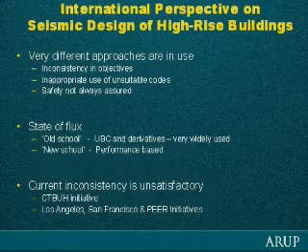So if we look at the differences between the two schools: the old school only allows you to use certain structural systems. It prescribes minimum lateral forces, and it's got rules for everything—you have to do this, you have to do that. It's a single level check based around a 500-year return period. When you finish the design, you don't actually have to show that it will perform in a satisfactory manner—that's implied by the fact you followed all the rules. And frankly, beyond about 100 metres in height, it's pretty well extrapolation, because the codes and systems and rules were never envisaged for the modern generation of ultra-high-rise buildings.

The new school is performance-based or deformation-based. Here we're looking at setting meaningful performance targets which your clients can have a say in deciding. We've got total design freedom—I've got another talk this afternoon and I'll show you where that can lead us. There's no prescribed systems, you can do what you like, provided it works.

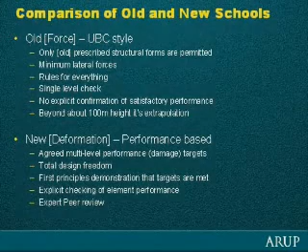And then you have to demonstrate from first principles that the design targets are met, and we look on an element-by-element basis rather than an overall system basis. But the common feature of the procedures as carried out in various parts of the world is that there is an expert peer review as part of this process.

And in keeping with modern thought, we're moving away from the idea of seismic forces and moving towards the idea of seismic-induced deformations, and there's various good reasons why we should do this. Working up from the bottom, ductility demands are related to deformation. Damage, non-structural damage, is related to deformation. And another thing very handy for us designing high-rise buildings, which have very long natural periods, is that in this long period range—it's been known for a very long time—the amount of deformation is not really very sensitive to how strong you make your structure. So the idea that providing force or strength gives you safety is not necessarily the right way to be thinking of it.

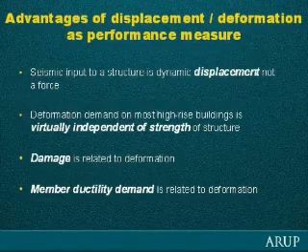Performance-based design is in practice in Japan and China, and it's mandatory for buildings exceeding certain height limits. There are no minimum strength limits, so there's no minimum base shear. There's no prescribed systems, but you have to assess damage by first principles, and you check things element by element, story by story, to make sure your performance targets have been met.

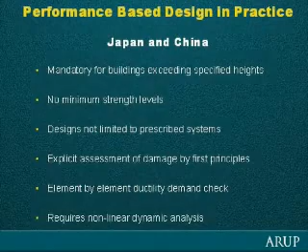But it does require non-linear dynamic analysis, and people have tried to persuade me for years that static pushover is the answer to all our wishes and requirements, but it simply isn't for high-rise buildings, where they are multi-mode structures if you think of them in an elastic sense. So in Japan, it applies to all buildings over 60 metres, and there's a two-level check.

The first level is an elastic check to make sure the structure essentially remains elastic, that is undamaged. And this is related to the important issue of economic loss. We're maybe not only concerned about life safety, but also economic loss and damage.

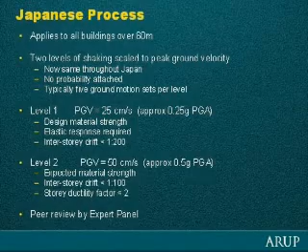The second level is at twice the amount of shaking, and there is an interstory drift limit, and various ductility factors must not be exceeded. But there is peer review by an expert panel of 24 professors who give you a grilling.

And it won't be approved unless they're fully satisfied that the building works. In China, it's very similar. Thinking about what we might end up producing, I think that what they've set in place in China is very sensible, because they have different seismic zones in China, and there are various limits they set based on the structural form and the seismic zone.

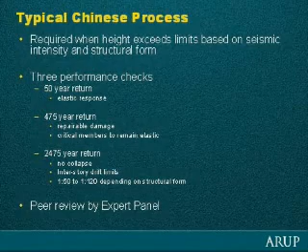That seems quite sensible. They have 3 performance checks, which, if you want to look at the details, are there. But again, there's a peer review by expert panels. Again, it is largely professors who make sure that they're completely satisfied. And they've stopped things in the past. They say, I'm not satisfied by that, go away and do something else.

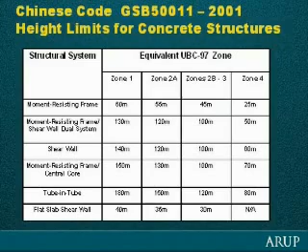This just shows the Chinese height limits for concrete structures, just showing that they've thought about what should be permitted, what shouldn't be permitted in their different seismic zones.

So if we compare with what people are more familiar with, probably in most of the world, it's the UBC, IBC, Eurocode 8 is similar. It's a force, strength-based approach, looking just at life safety and force over 500-year return period, based on linear analysis, normally linear response spectrum analysis with ductility reduced

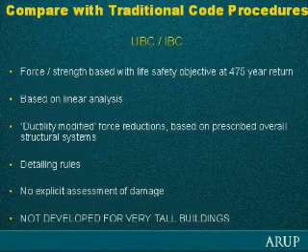reductions, based on prescribed overall structural systems. And there are detailed rules, no explicit assessment of what damage might occur. And I'll just remind you, it was never designed for very tall buildings. So what are the problems with it?

Well, only a dual system is permitted. And if we look at this, it can be both uneconomic and architecturally restrictive. And also, it doesn't guarantee the building will perform very well. So altogether, that's not very helpful.

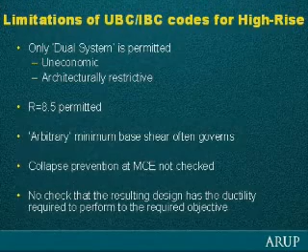You're permitted a very large force reduction factor, but an arbitrary, and it is entirely arbitrary, minimum base shear often governs. You don't have to check whether the building will collapse at a high level of shaking, and you're not required to check that the design you've made does actually perform to the actual required objective, which is life safety.

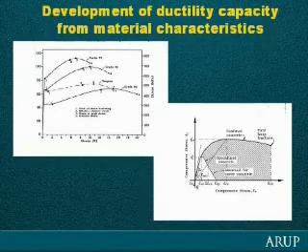And this is a bit of a problem, because we've been taking a look at some UBC designed buildings, assessing them by performance-based methods, and finding actually they don't perform very well at all. And we can look at how much deformation capacity is available by looking at the basic material properties of concrete and reinforcing steel, for example, for reinforced concrete buildings.

And depending on how much, many of our structures these days are core structures, reinforced concrete core structures or shear wall structures, and in general, the cores or shear walls will take gravity load. I mean, a part of the vertical system as well.

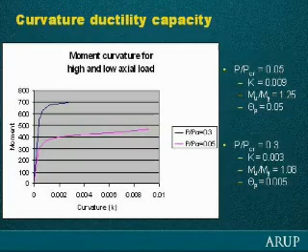This is the economics of high-rise buildings. And basically, if you've got a very heavily loaded or significantly heavily loaded member in compression, the permissible ductility is about a tenth of what it is if you don't have that axial load. So this actually is quite a problem, and people are applying the code without realising this.

So here, this is a floor plan for building. Is this a dual system? It's got concrete shear walls, it's got perimeter frames. Is it a dual system? Is R equals 8.5 appropriate?

And this idea, well, small print on a dual system, which people don't often read, is that the lateral resisting element should not take much gravity load. They don't say how much, but that's the implication. But actually, if we're designing a building 200, 300 metres high, we don't really want some elements to have not much gravity stress on them and others to have a lot of gravity stress on them, because we end up with differential vertical shortening problems. So there's other risks which haven't really been thought through.

Anyway, this actually isn't a dual system in the strict sense of the code, because the core is taking a lot of gravity load.

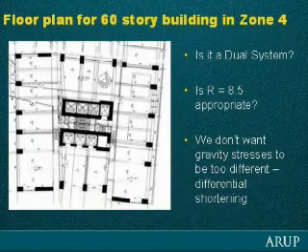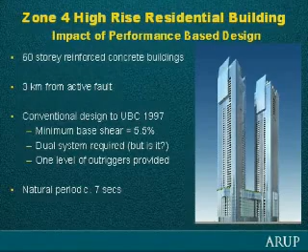And if you look at this building—I won't talk about it this afternoon in other contexts—the minimum base shear is 5.5% to the code. It's got outriggers. Are outriggers allowed in the dual system? All these questions aren't really covered in the old code.

What we found was that although the code says you've got to design for 5.5% base shear, you can show it performs adequately designed for 2.5% base shear, which is actually what the effective wind load was. And if you had designed it even for the 5.5% base shear, doing the design of the core the way you eventually do it, you reduce your seismic forces by a factor of 8.5.

You stuff your core full of compression reinforcement to take those reduced loads with the concrete, and you find it has negligible ductility at the bottom of the core, which is one of the places where you need significant plastic rotation. So the code design wouldn't work, yet here's a design with a lot less material that works better than an unsafe code design. This is good news, because we can do a better design more economically using performance-based methods.

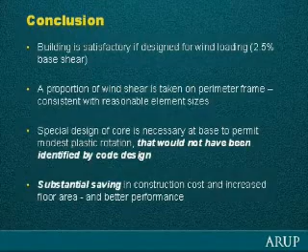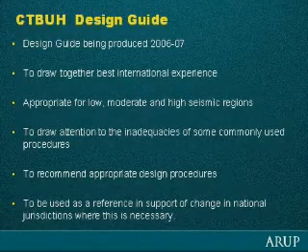What we're trying to do is produce a design guide. We're writing it right now. We want to look at best international experience. We want it to be relevant not only in high seismic zones, but in lower seismic zones too. We want to draw attention to the inadequacy of commonly used procedures and recommend more appropriate ones. In some countries a UBC-style code is the law—you have to comply—so we hope this guide might be used as a reference in support of change in those jurisdictions, because it needs to happen.

It's meant to be wide-ranging—it's not just about structural engineering. There are lots of issues too, such as, when we move into time history analysis, selecting ground motion.

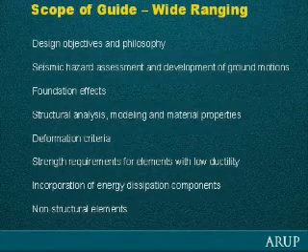It's being written by these two people, myself, Klemencic and Willford, and we want to send it round for full review by whoever would like to review it. So if you'd like to review it, I'd be pleased to take your email address and we'll include you on the list. Thank you.

Okay, brief feedback on the CTBUH working group on the sustainable design of tall buildings. You'll notice there is not a tall building represented in the title slide, which was a conscious decision.

I want to start with this, which I think represents one of the biggest challenges facing the incorporation of true sustainable design in all buildings today: it's greenwash. What that means, in my book, is the lack of systems to allow anybody to claim that their building is sustainable, the way forward, the answer, and then not back that up afterwards.

They involve so much special research that they have this opportunity to really push forward systems of sustainable design—whether that's technologies or sustainable design approaches at a conceptual level. They have the opportunity to lead the way, because there's an expenditure in them, both financial and in personal and professional energy, which is perhaps not replicated in smaller buildings due to their size. So tall buildings really could be leading the way.

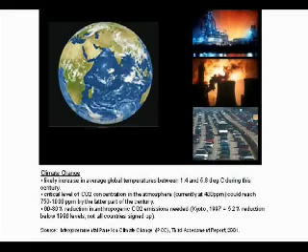I just want to run through quickly a draft agenda for what this group could be studying. I'm not going to dwell on the reasons why sustainability is important. I'm sure you all know that, to do with climate change and other factors.

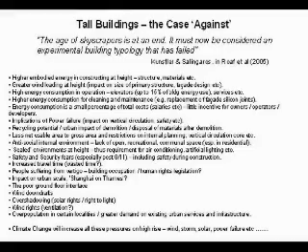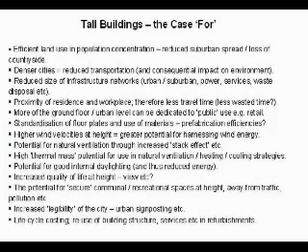Of course, there's a case for why they are environmental, or good sustainable approaches. This has to do with the bigger picture, and the bigger picture is to do with denser cities. It's to do with not an ever-encroaching suburbia on developing cities, and by developing cities I mean those developing in places like China, India, and the developing world.

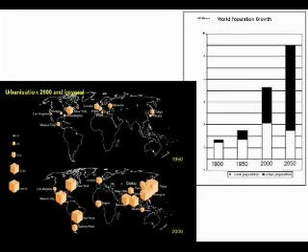The relationship of tall buildings to cities is important, and it's not just the developing world. In the UK, population demographics, even though our population is more or less static - not as static as they thought, because of immigration from Eastern Europe, but more or less static - there is still a requirement for 2.6 million new homes by 2020, even in a country like the UK. Now why is that?

Because of the population demographics, social demographics. People are living longer, there is more divorce, there are more single person homes. All these factors require homes. Where are these homes going to go? A lot of people believe they need to be provided in denser cities.

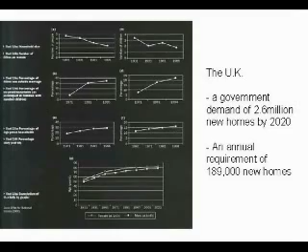I put this slide up not just to show that the UK and the USA are very good at energy consumption, or consumption full stop, but also to show that approximately 30 to 40% of all energy usage is reckoned to be taken up by buildings, and a further 30-40% through transport. Now, buildings and transport - that's cities. That's within our remit as professionals, what we can influence. That's the majority of energy usage.

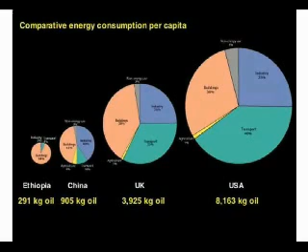The presentation yesterday on Songdo City - there are professionals amongst us actually creating whole new cities. And that relationship between buildings and transport is vitally important.

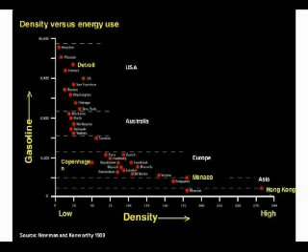Again, one of my favourite graphs to show, to reinforce this - this is a graph of energy usage against density. You'll see that some of the most energy efficient cities are the denser cities, such as Hong Kong, Singapore, and some of the European cities where public transport systems and things like this are perhaps more used.

So the working group - I should explain at this point that the working group, the Council Working Group on Sustainability, consists of just me. It is the newest of the 4 working groups so far. So these are just some thoughts I'm putting across, and the message I want to put out today is, if you want to get involved in this, please contact me, because these are just my ideas.

But it's going to be looking at international case studies - international case studies that have been hailed as sustainable tall building designs, of which I'm sure many are. But if they're so great, why can't we see the data? Why can't we use that data? Why isn't it monitored? Why can't we use the data to further the cause, so that this is implemented more by clients and developers?

Interestingly, another major challenge in tall buildings is that energy usage in itself is actually not much of a factor for most major corporations. It might make up somewhere between 1 and 2% of their total expenditure when you compare to salaries and all the rest involved in running that operation. So if someone comes to a client and says, I can cut your energy usage by 50%, that's obviously not as much of an incentive as cutting the salary bill by 50%. So that's also a challenge in getting professionals involved in the financing of tall buildings, and buildings generally, to take sustainability seriously.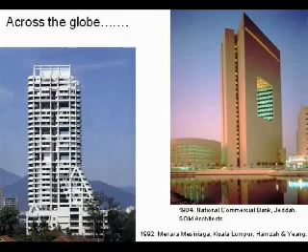So, international case studies across the globe, built and unbuilt. There's a lot of work being done in academia and other places which actually doesn't get to be built, but is of real worth in terms of what it brings to the party.

Sustainability for me is not just about energy usage, it is about other things - for want of a better term, sustainability of an internal environment. As in all architecture, things are about compromise and trade-off. We could make the most energy-efficient building, but it's also about quality of internal space.

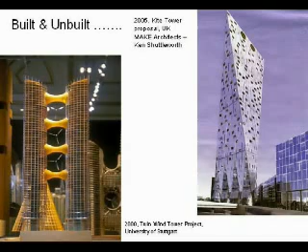Some of the most interesting projects we saw yesterday were not necessarily those that were just glass towers. However, that has a knock-on effect on the quality of internal space, light and other things. So this has to be considered in symbiosis.

However, these people are almost all exclusively from one socio-economic group - young professionals who are at that stage in their life where they want to live in the city. As soon as they get married and have kids, they move back out to the suburbs where they want a house and a garden, because tall buildings around the world generally do not provide for families. There is a lack of community, social, public space.

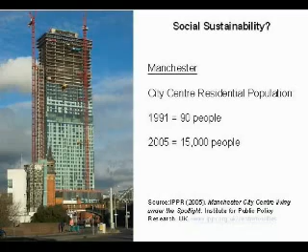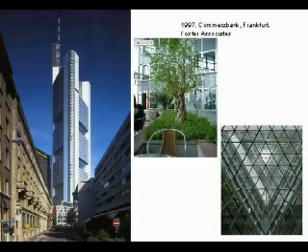I'm not going to go into this, but one of the projects that we did at my last university was looking at how Commerzbank could be a model for a sustainable residential development, and how these sky gardens that step up the tower could actually become communal gardens.

To finish, an initial agenda. As I've said, there is an opportunity for tall buildings to lead the way in building sustainability because of the investment in them.

I think this agenda needs to dispel the myths, dispel greenwash, and make a push for post-occupancy monitoring amongst clients and professionals. Who knows? Could we have a LEED rating point for agreement for post-occupancy monitoring? Or could a requirement for LEED rating actually be an agreement for post-occupancy monitoring?

Controversial statements.

An intention for the group is to examine best practice internationally. One of the things that the Council does very well with its international base and cross-disciplinary membership is actually looking at what is the criteria, what are the differences, what are the similarities across LEED, BREEAM, CASBEE and all the other international bodies, and trying to bring some sense of the different approaches there.

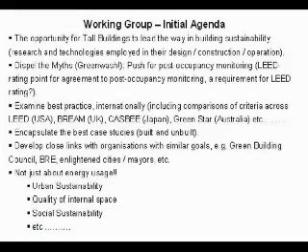Encapsulate the best case studies in the built and unbuilt realm. Obviously develop close links with similar organisations. And just to reiterate, for me it's not just about energy usage - it's about urban sustainability, quality of internal space, social sustainability, and all the other factors. And if you're interested, please get involved.